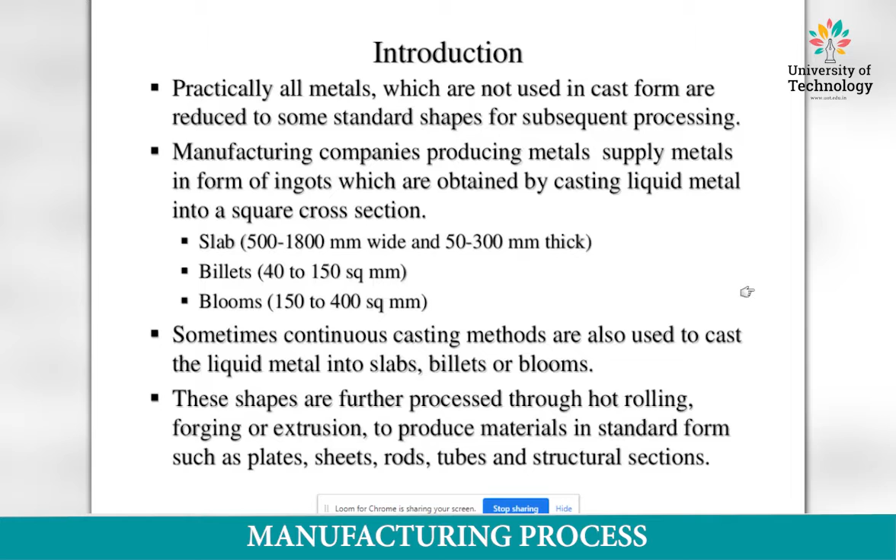Hello students, today we'll discuss forming processes. This topic is covered in manufacturing process for this semester. First, we'll discuss the forming process.

Practically all metals which are not used in cast form are reduced to some standard shapes for subsequent processing. This is called forming. Manufacturing companies producing metal supply it in the form of ingots, obtained by casting liquid metal in square cross sections.

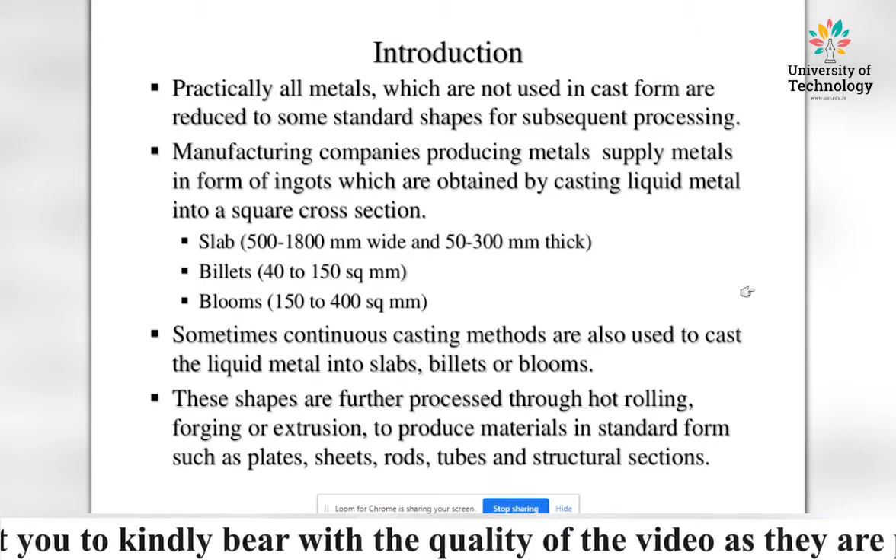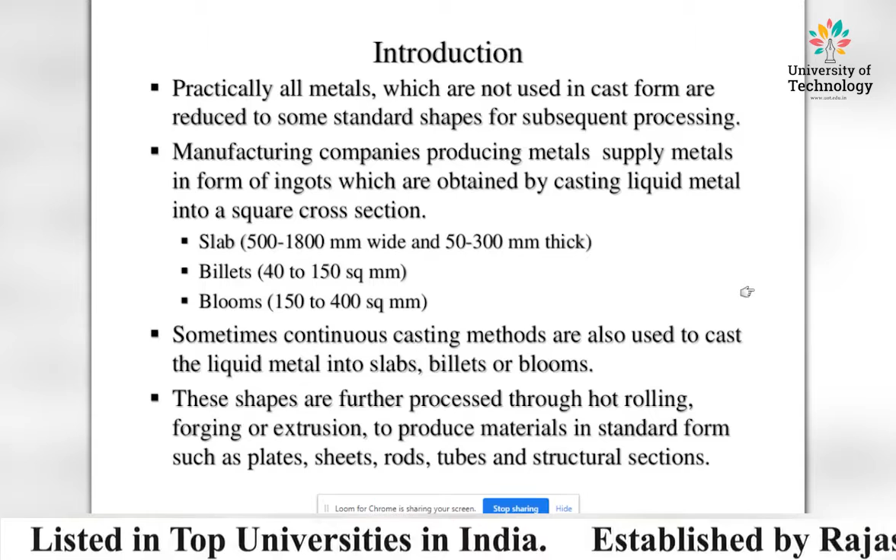These square cross sections have different names according to size. Slab: 500 to 1800 mm wide and 50 to 300 mm thick. Billets: 40 to 150 square mm cross section. Blooms: 150 to 400 square mm cross section area.

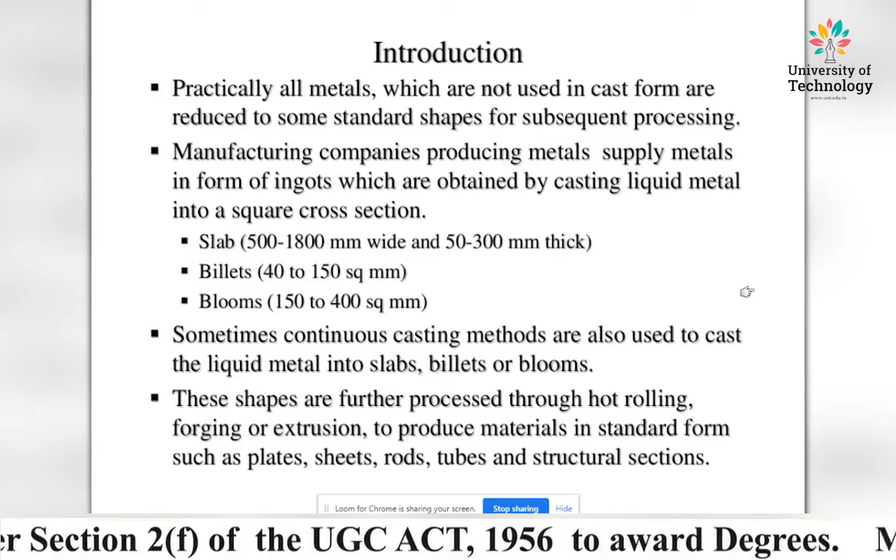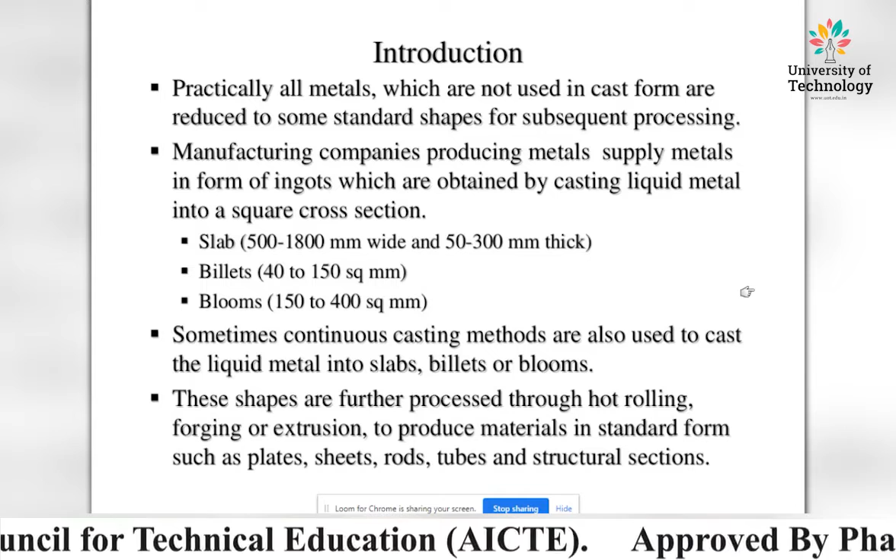Sometimes continuous casting methods are also used to cast liquid metal into slabs, billets, and blooms. These are further processed through hot rolling, forging or extrusion to produce materials in standard forms such as plates, sheets, rods, tubes, and structural sections.

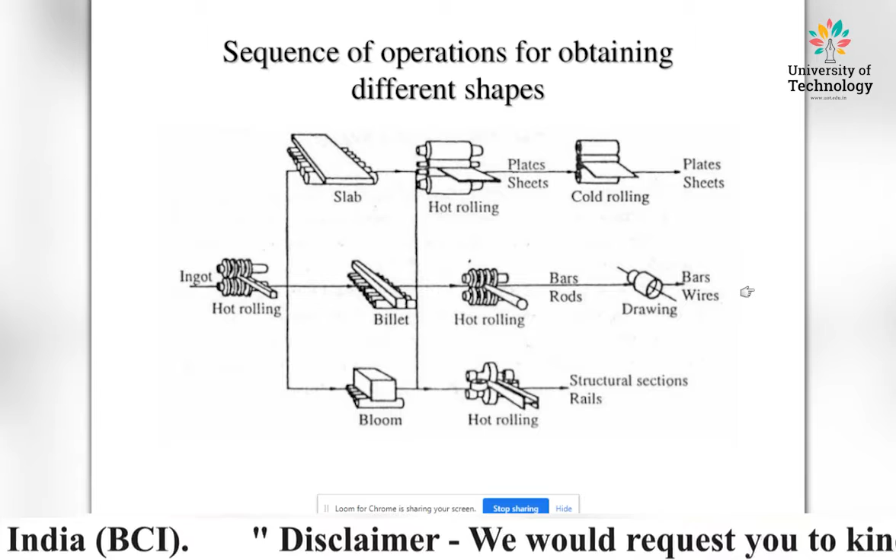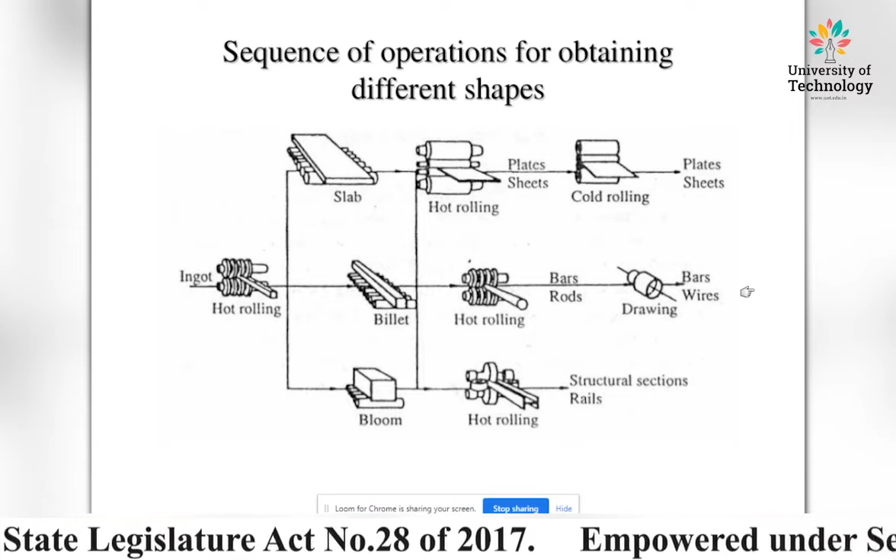The basic sequence of operations for obtaining different shapes: first the ingot is obtained by hot rolling into slab form, then again hot rolling gives plates and sheets, and then cold rolling produces thin plates or sheets.

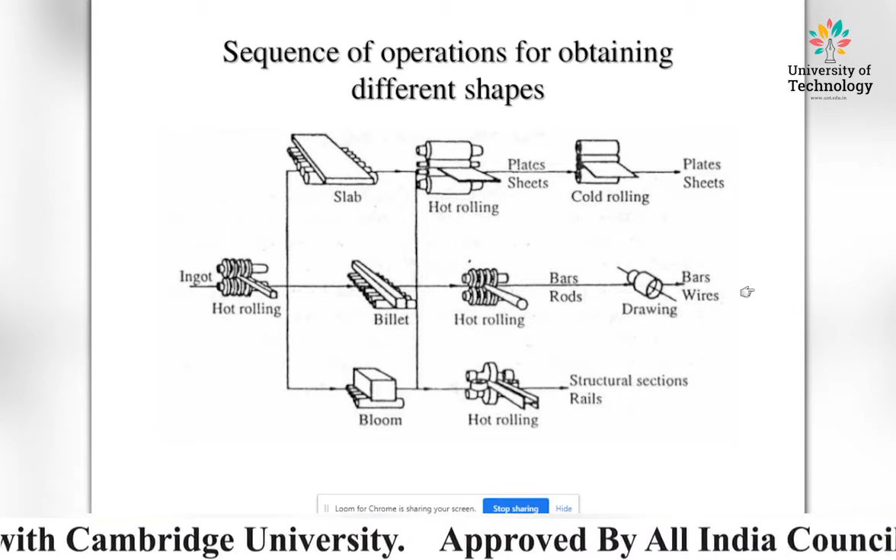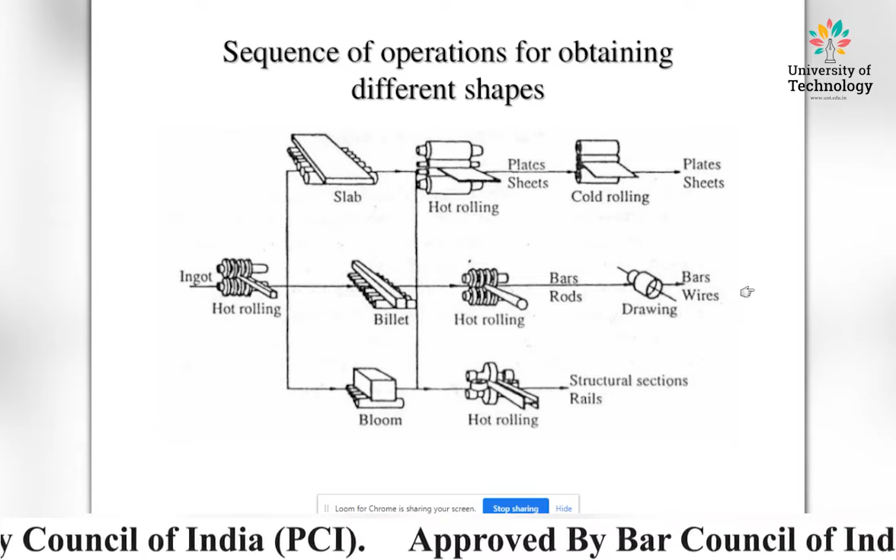In the second process, the ingot is produced from hot rolling, then made into billets, and the next step is again hot rolling to convert into bars and rods, then drawing, which finally produces bars and wires.

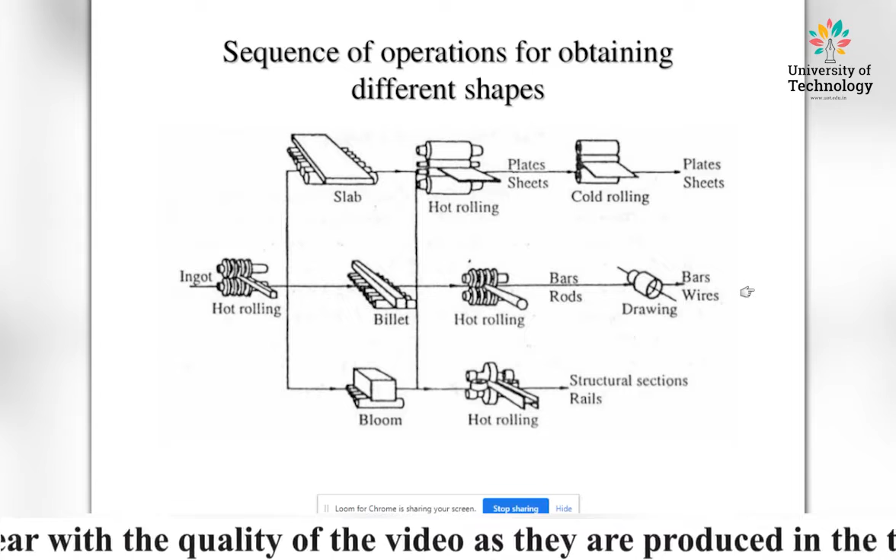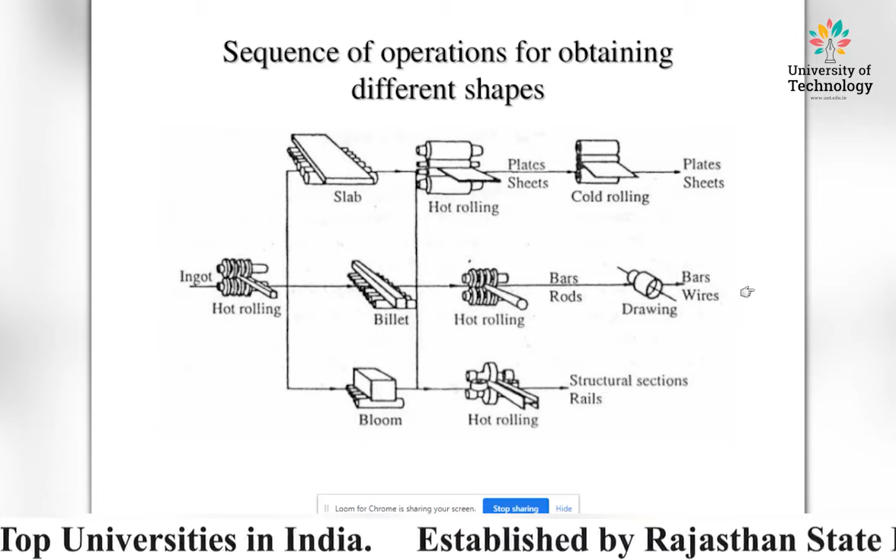The bloom is produced from the ingot by hot rolling, then goes for the next hot rolling operation to produce structural sections and rails, as shown in this figure.

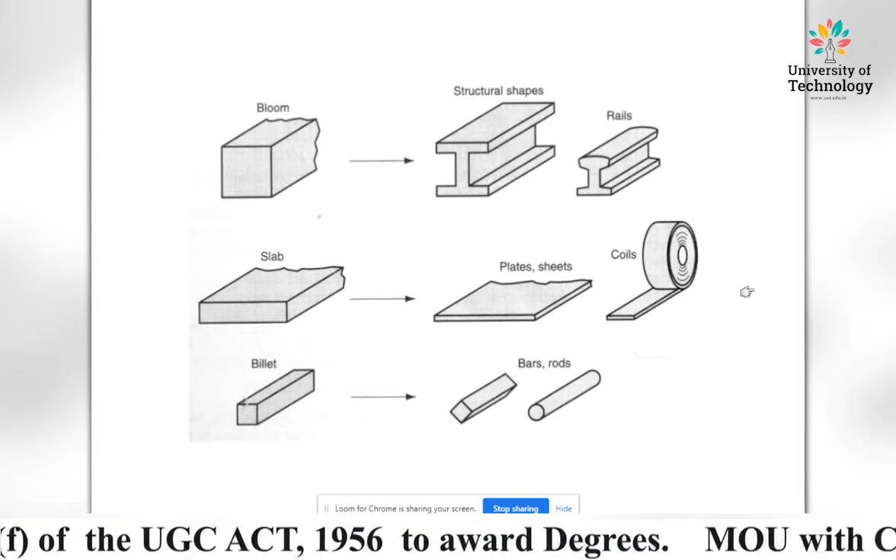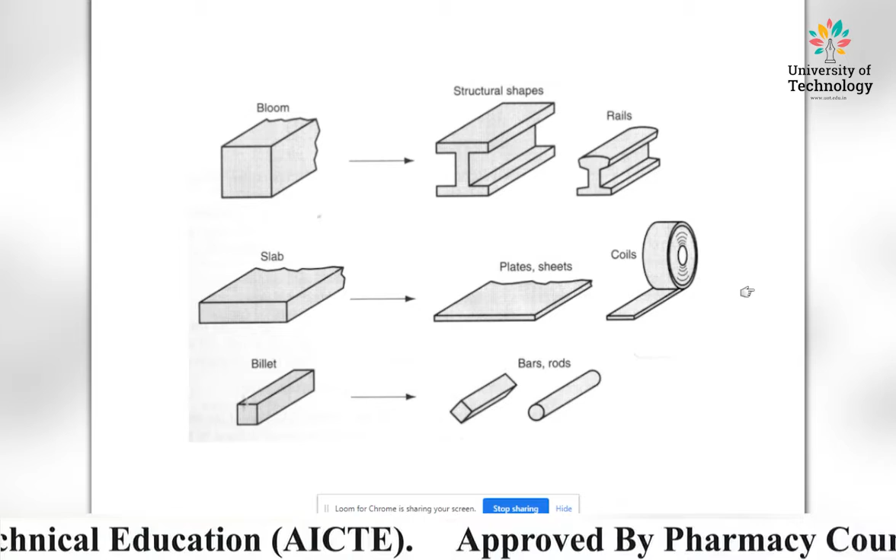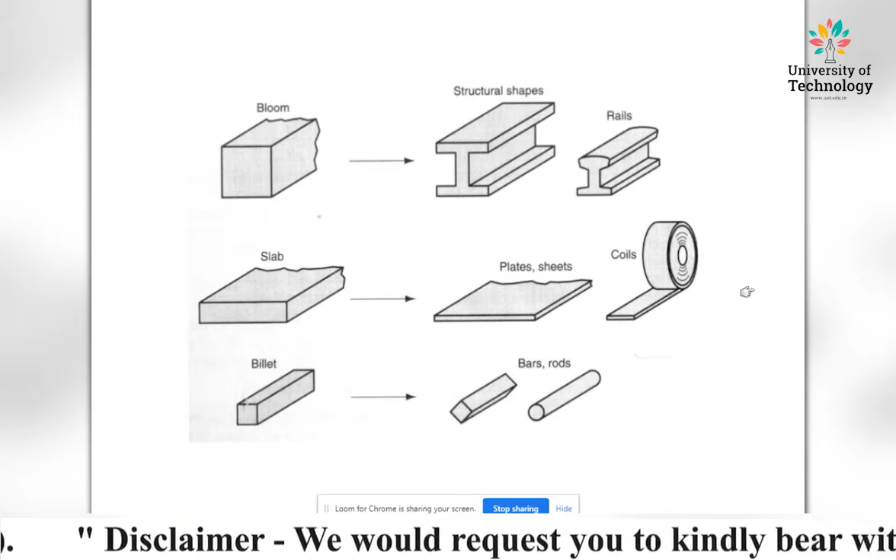We can see in this slide various figures showing the sequence of operations. The bloom produces structural shapes used for rail track applications, the slab produces plates and sheets, and finally coils, and the billet produces bars, rods, etc., as shown in the slide.

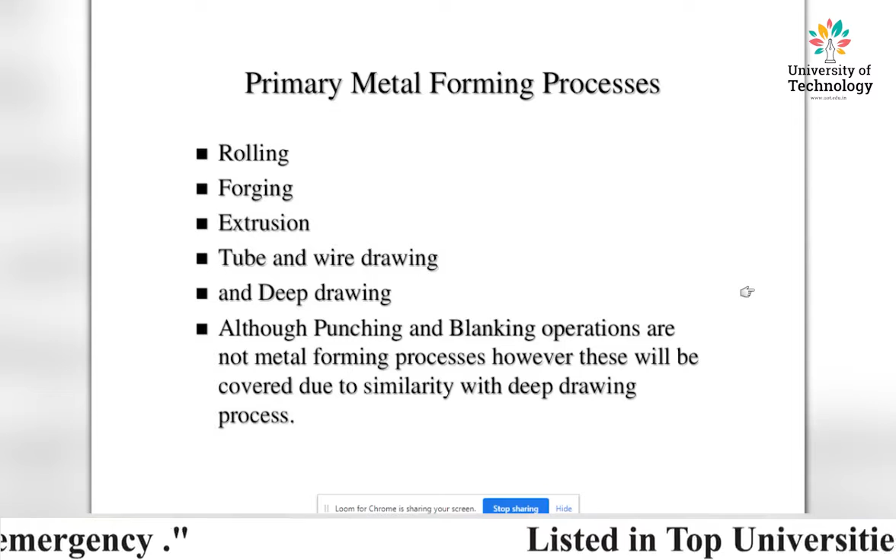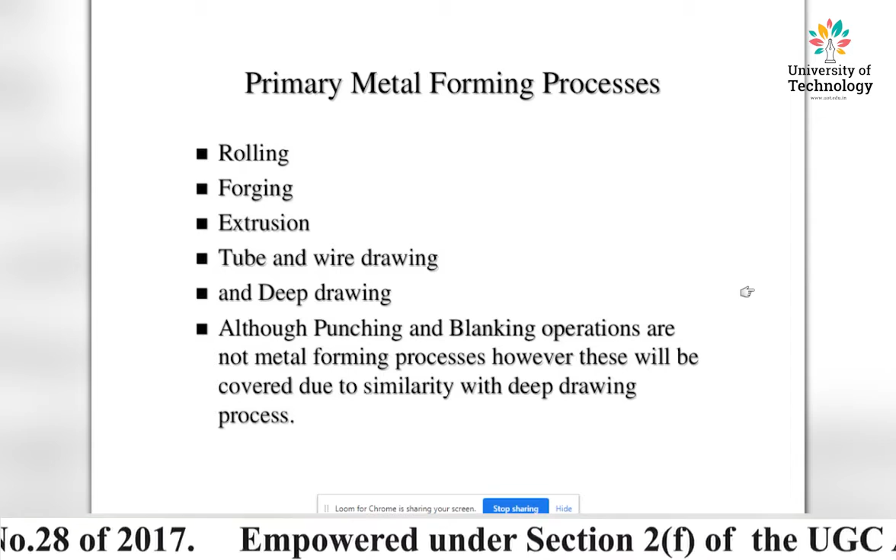Primary metal forming processes are rolling, forging, extrusion, tube and wire drawing, and deep drawing. Although punching and blanking operations are not metal forming processes, they will be covered due to their similarity with deep drawing.

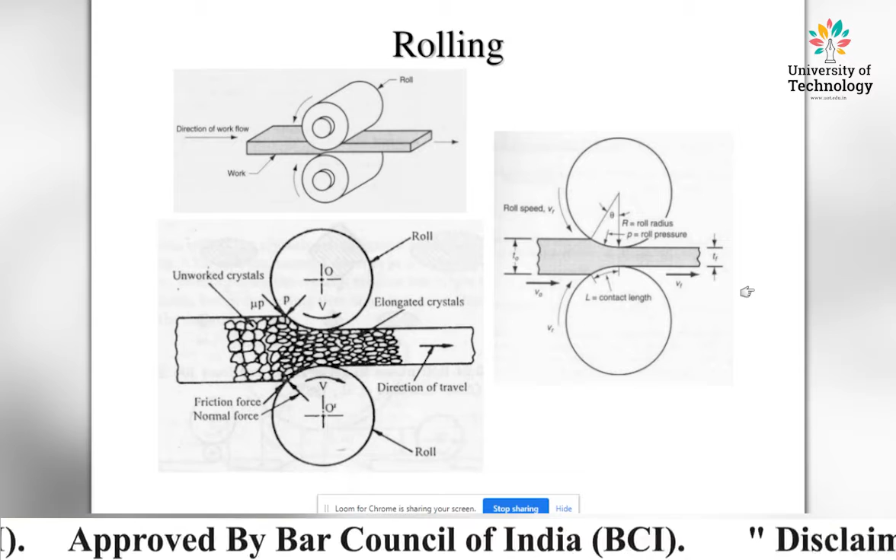Rolling: we can see two rollers here, both moving in opposite directions. The work passes in between the two rollers, and the thickness of the billet or sheet is reduced by the pressure of the rollers squeezing the metal as it passes through.

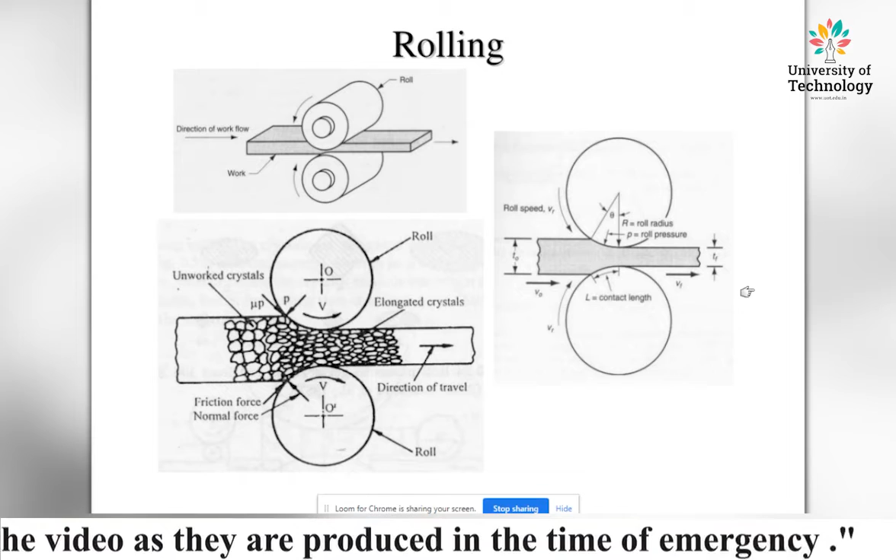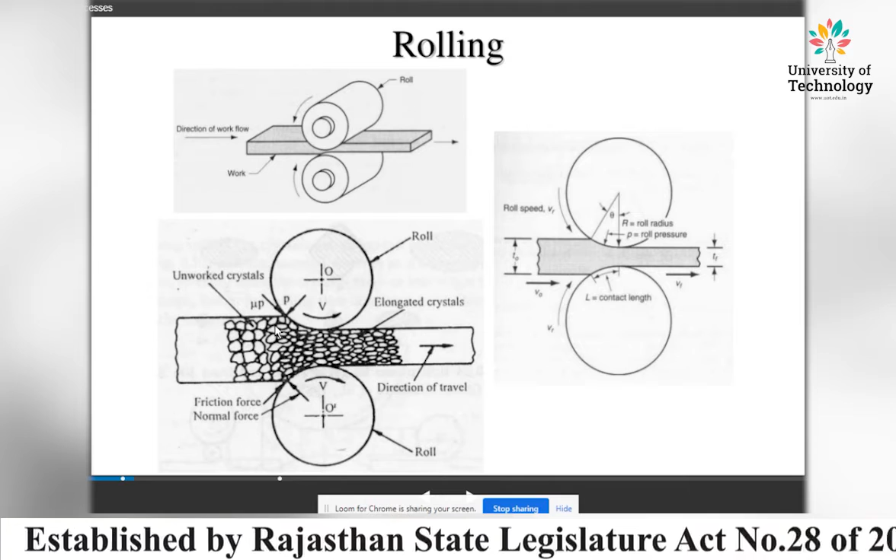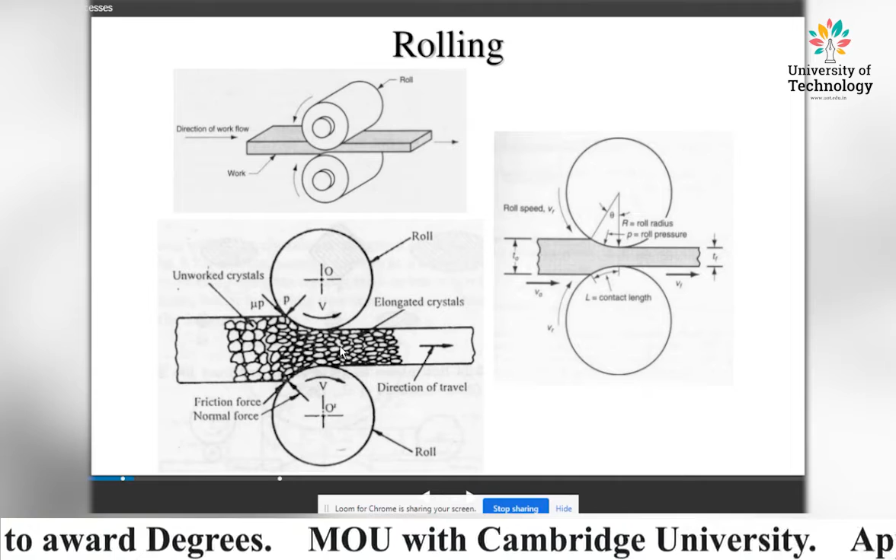We can see in this slide, in the second figure, unworked crystals shaped like this. After squeezing or rolling of this billet, the crystals become elongated in shape, in the direction of travel, with friction force acting between the roller and the workpiece.

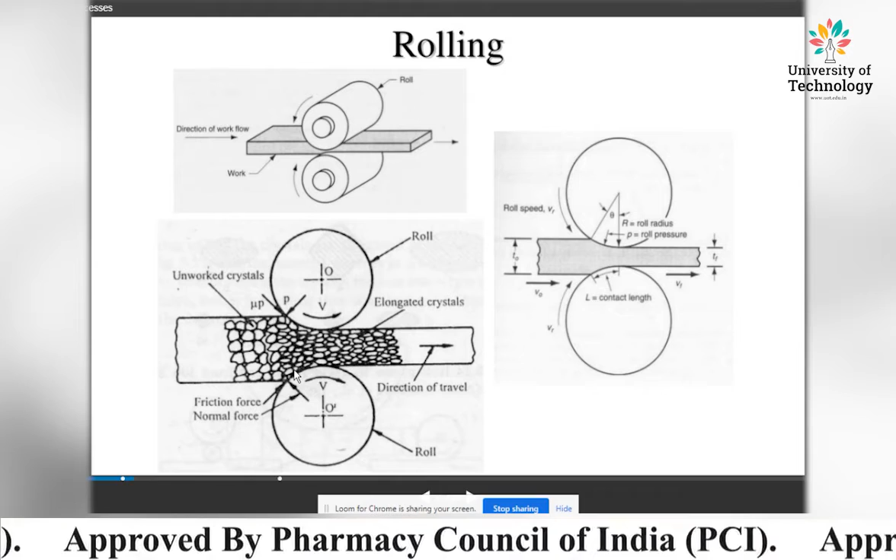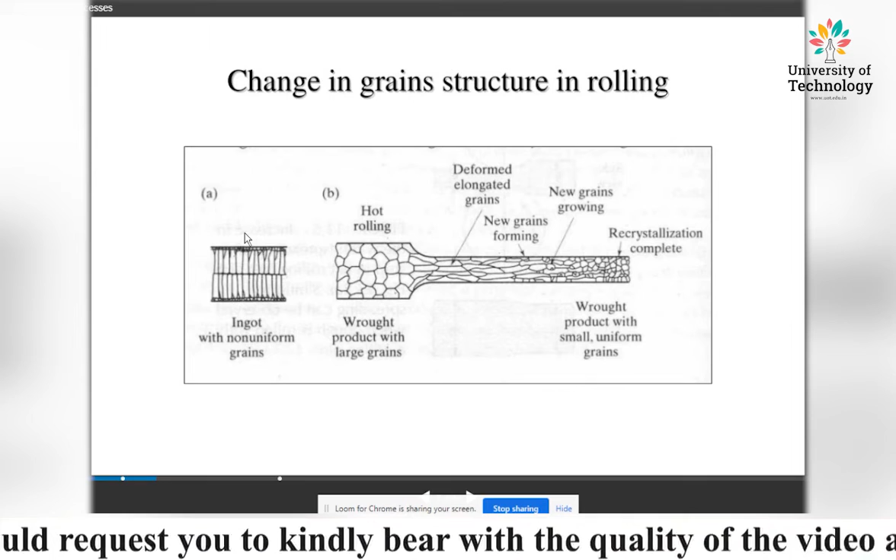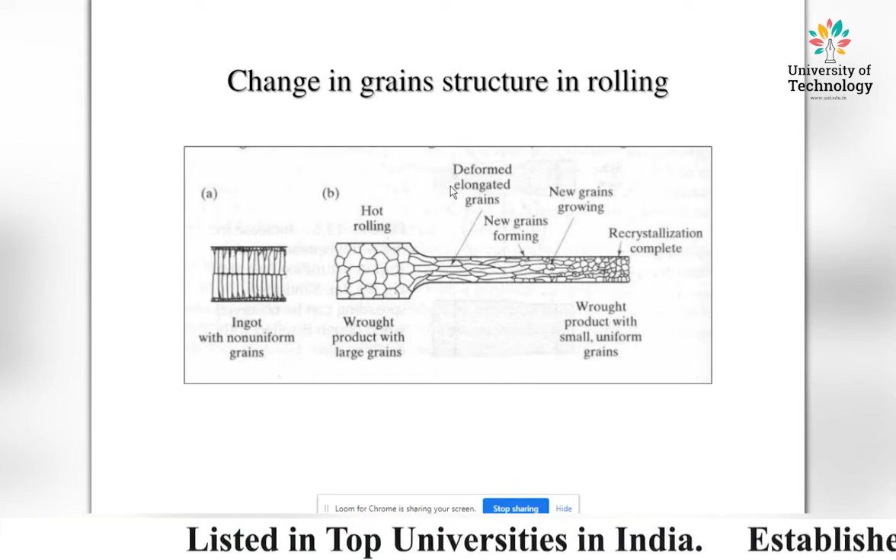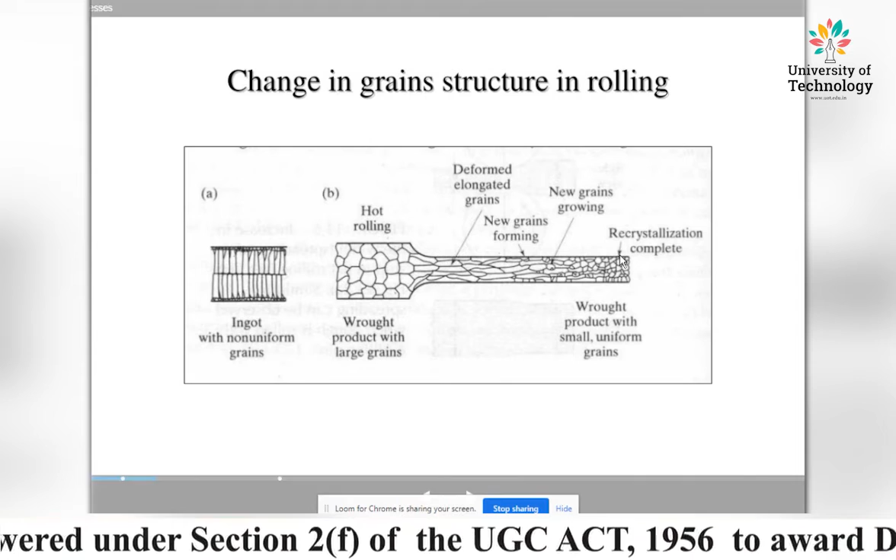Change in grain structure during rolling: in figure A, the ingot has non-uniform grains. In figure B, during hot rolling, the wrought product is produced with large grains. After rolling, deformed elongated grains form, new grains grow, recrystallization completes, and the cross section area is reduced after this rolling process.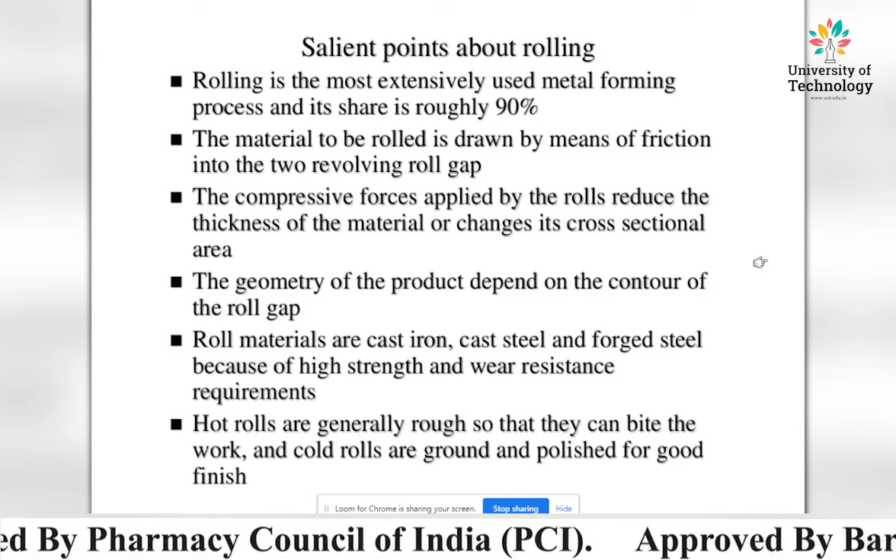Salient points about rolling: rolling is the most extensively used metal forming process, and its share is roughly 90%.

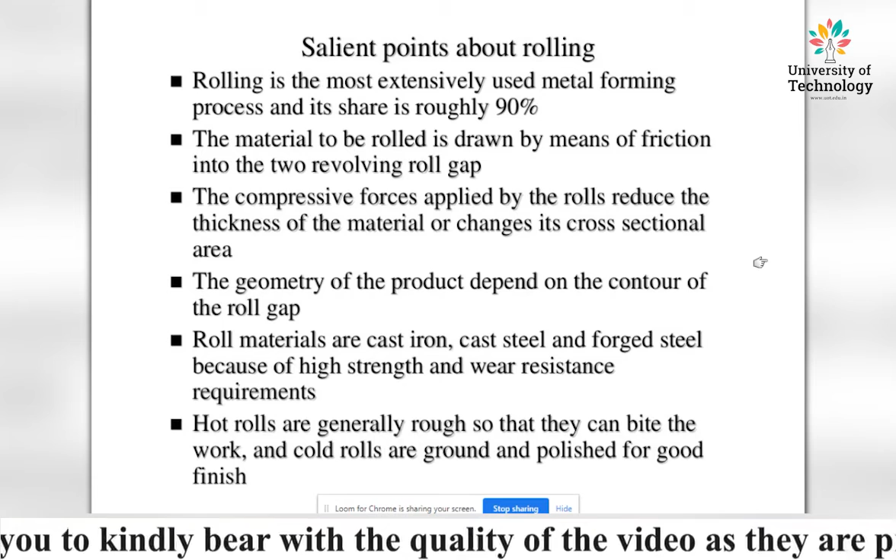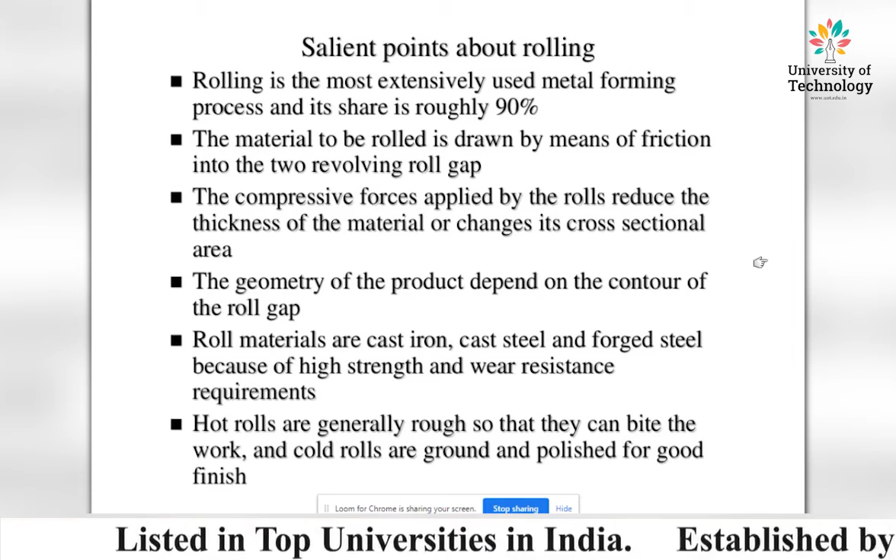The material to be rolled is drawn by means of friction into the two revolving roll gaps. The compressive forces applied by the roll reduce the thickness of the material or change its cross-section area. The geometry of the product depends on the contour of the roll gap. Roll materials are cast iron, cast steel, and forged steel because of high strength and wear resistance requirements.

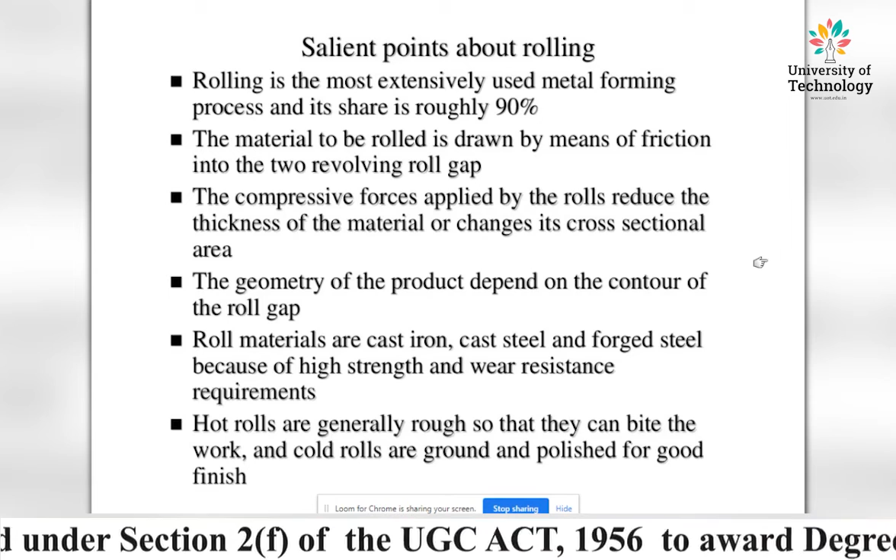Hot rolls are generally rough so that they can bite the work, and cold rolls are ground and polished for good finish.

In rolling, the crystals get elongated in the rolling direction. In cold rolling, crystals more or less retain the elongated shape, but in hot rolling, they start reforming after coming out from the deformation zone.

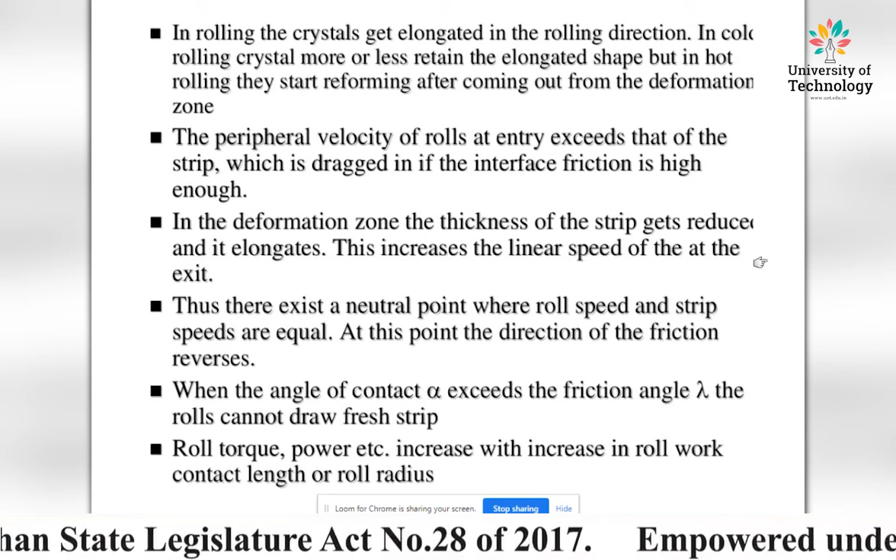The peripheral velocity of rolls at entry exceeds that of the strip, which is dragged in if interface friction is high enough. In the deformation zone, the thickness of the strip gets reduced and it elongates. This increases the linear speed at the exit.

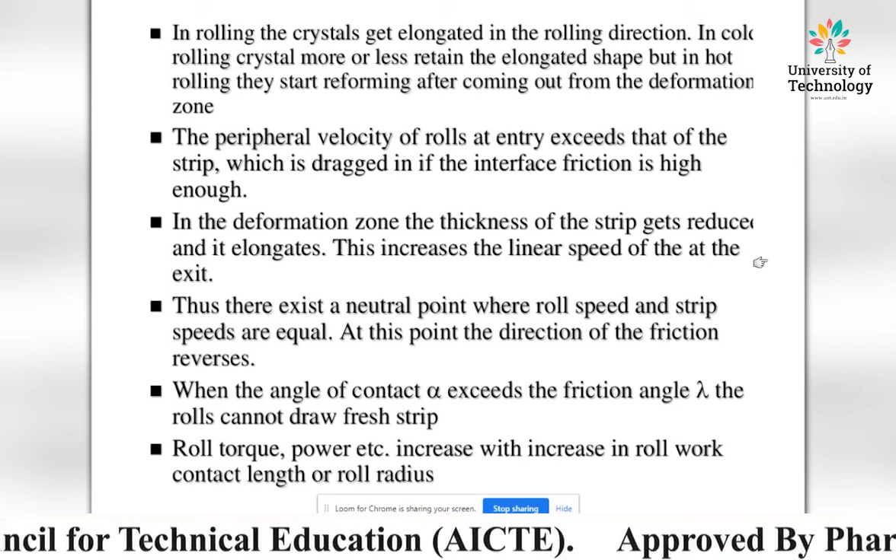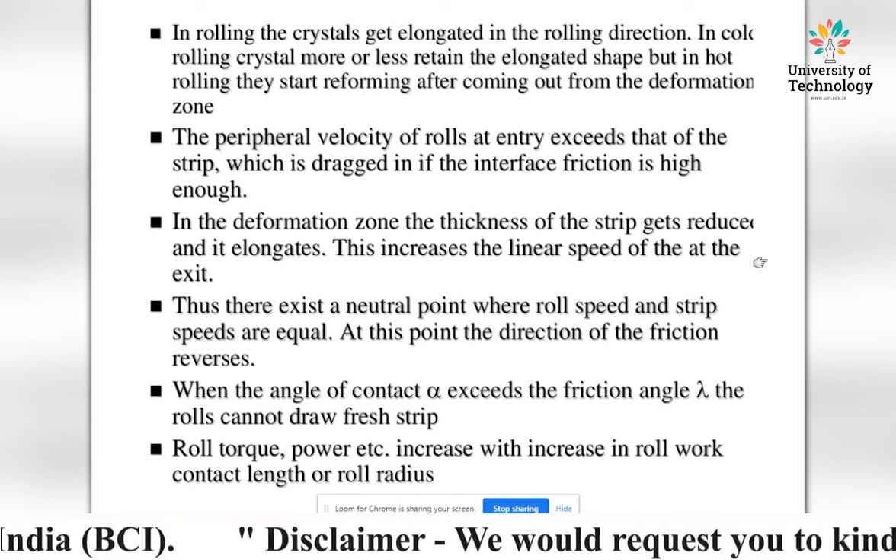Thus, there exists a neutral point where roll speed and strip speed are equal. At this point, the direction of friction reverses. When the angle of contact alpha exceeds the friction angle lambda, the rolls cannot draw fresh strip. Roll torque and power, etc., increase with an increase in roll work, contact length, or roll radius.

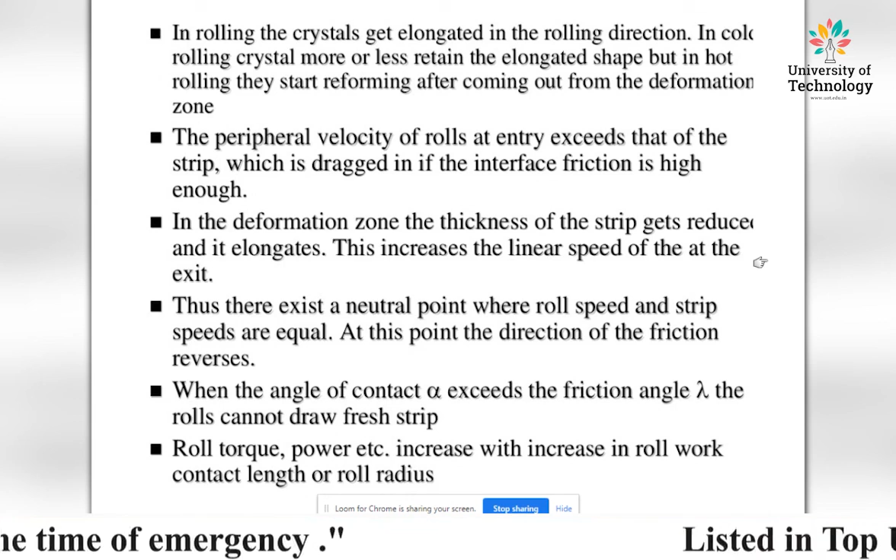Students, these are the basic main points about the rolling operation. Keep these in mind, as questions may be raised for competition purposes or in your end-term examination. Thank you.